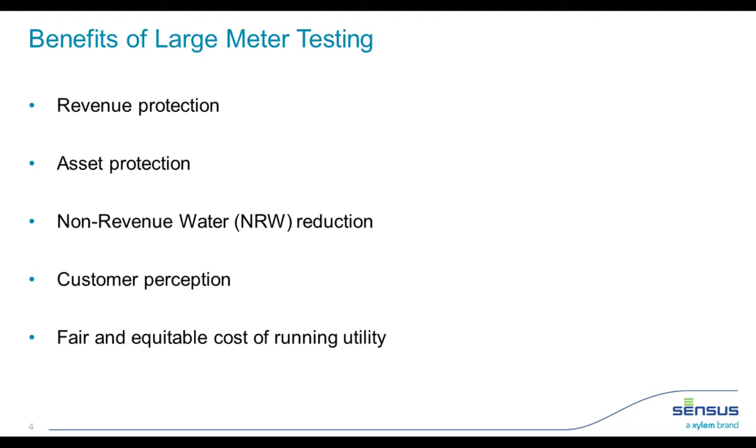A good meter testing program discovers those accuracy drifts and allows you to recalibrate those large meters and protect that revenue stream coming in. It's listed in the AWWA M6 manual that the largest 10% of a utility's meters account for 40 to 60% of the consumption and ultimately the revenue coming in from water for that utility. So it's particularly important to keep testing the large meters.

The next benefit of large meter testing is asset protection. Utilities spend a lot of money on large meters. It's a large capital investment, so having a good program that regularly tests these and checks not just the meters, but the whole installation—the vault, the plumbing, the valves and installation around the meter. By regularly checking up on those, you're preserving and protecting that large capital investment.

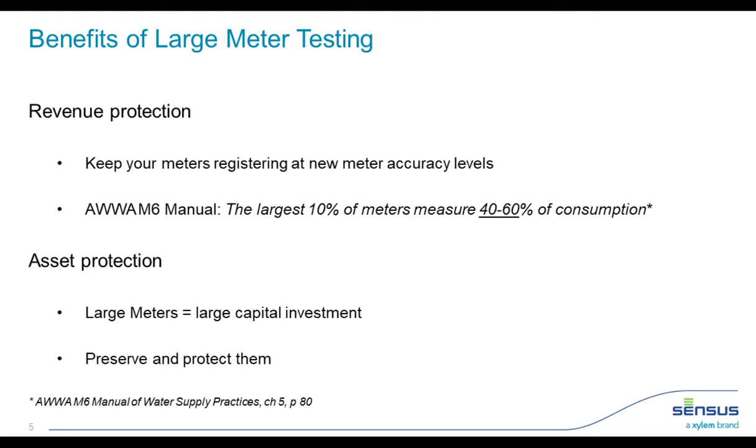Going back to the revenue protection benefit, just an example here. Assume you have a 4-inch meter supplying a medium-sized hospital. According to the Energy Star Portfolio Manager Report in October 2012, hospitals typically use 315 gallons of water per bed per day. So about a 300-bed hospital would use about 100,000 gallons of water per day. So that's our first assumption.

Next assumption is the cost of a meter test is $500. That could be the internal cost of a utility doing the test themselves, their labor, the cost to roll a truck, the opportunity cost of the water they're using and not charging the hospital for, or it could just be the cost they're paying some third party to come test the meter. So that's assumption number 2.

Another assumption is the customer water rate is $5 per 1,000 gallons of water. So if you test this 4-inch meter and discover a 5% inaccuracy, if you're able to recalibrate that meter, you can recover basically $9,000 of water revenue per year. It's a substantial number, and that's for a 5% inaccuracy. $9,000 is enough to more than pay for the test and pay for testing of several other meters.

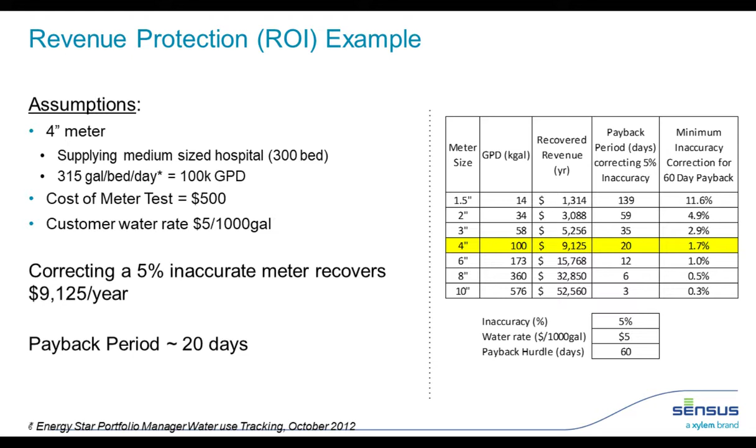Next benefit of large meter testing is non-revenue water reduction. Many utilities are tracking and reporting non-revenue water as a metric. Meter inaccuracy is an apparent loss versus a real loss - it's not a leak, it's an apparent loss, which means that water is actually getting to the customers. It's just not being accounted for, and you're not seeing the revenue for that water. The good news is apparent losses can be addressed with a solid meter testing program.

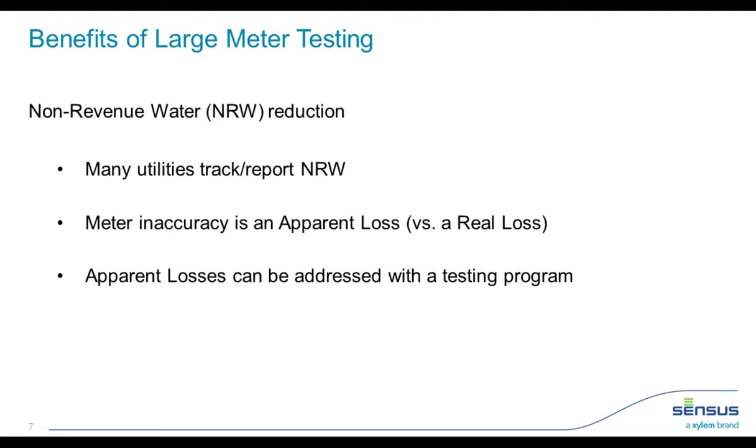Next benefit of large meter testing is customer perception. Take, for example, this scenario: you have an old meter in the ground, it's been running for 20 or 30 years. Let's say that the meter hasn't been tested recently, and over time the accuracy of that mechanical meter has drifted gradually down to about 85%. So the customer is only paying for 85% of the water they're actually using.

Then, let's say a new meter is installed, and of course, at the time of installation, that new meter is going to be 100% accurate. Suddenly, the customer sees the result of this meter install - they see a huge spike in their water bill, even though they know they're using the same amount of water as they were last month or last quarter. So they immediately believe there's an issue with the new meter, when actually it was an issue with the old meter. So having a meter testing program, a regularly scheduled meter testing, can prevent that initial drift down to 85%.

And then lastly, the last benefit of large meter testing is the fair and equitable cost of running the utility. This is straight from the AWWA M6 manual, actually: the primary reason for meter tests is to ensure the cost of water service is equally distributed among all customers. And also, the same goes for sewer costs of running a sewer system, which is usually tied to water billing.

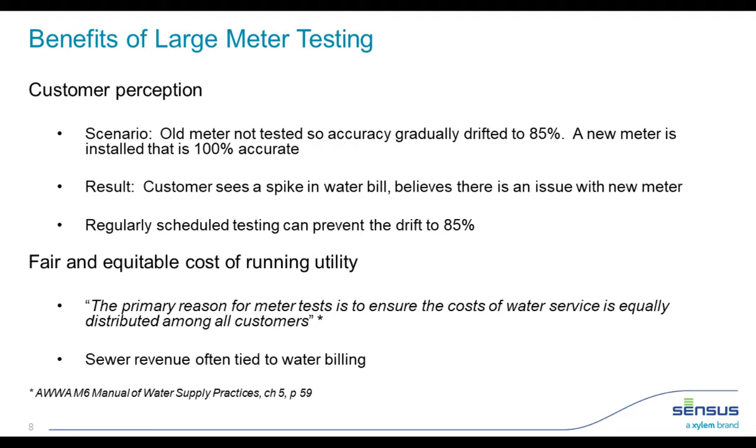Okay, next we're going to get into the testing requirements. In its most basic definition, testing the meter is flowing a known volume of water through the meter being tested, and then comparing that known volume of water to the consumption registered on the meter that you're testing. It can be done either in a controlled environment, such as a lab with a calibrated test bench, or it can be done in the field with on-site testing.

So the requirements for bench testing, of course, you need a calibrated test bench, and then due to the size of the C&I meters, you would need meters with an interchangeable measuring chamber, so you can easily just change the chamber out, take the chamber back to the facility with the calibrated test bench, instead of taking a whole meter out to have it tested.

Next comes trained personnel. You need people that are experienced and trained in conducting meter testing. And then lastly, but one part that's often overlooked is a system to manage the results. You need a way to record all your testing that's accessible, that you can look back a year from now and see how a particular meter tested over time. It's important for spotting trends. Basically, if you do the test and don't record the results, lost results is the same as no results.

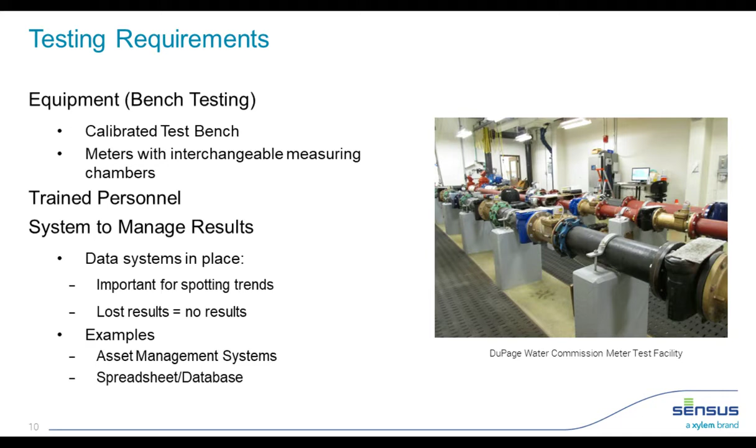So that's for bench testing. The other testing method I mentioned was on-site testing. And for on-site testing, you need a portable large water meter tester, such as the Omni V2 shown on the right, fire hoses and test risers. And then you need site equipment that's specific to the site of the meter where you're testing, such as ladders, hard hats, portable lighting, basically anything that you need to access that location where you're testing the meter. And then you also, of course, still need trained personnel.

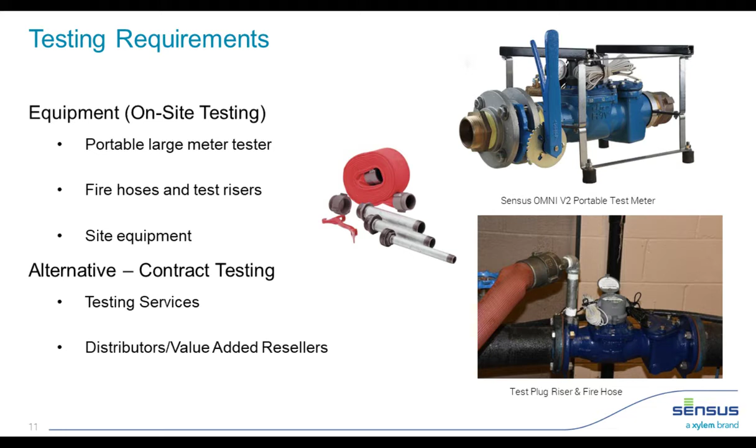The alternative to doing the meter testing yourself, again, is contracting out the testing. There are testing services that do nothing but large meter testing. Also, distributors and value-added resellers sometimes have the ability to conduct a large meter test.

So I went over the equipment and other requirements. Next, we'll jump right into the testing process.

So the first part of the process is basically deciding which meters you're going to test and preparing the site for that meter. You want to prepare the site always per AWWA requirements. And then also keep in mind that safety is the most important consideration when you're testing a meter.

You want to make sure you're following all OSHA safety precautions regarding air quality if you're working in a vault or a confined space, eye protection, ear protection, fall protection if it's a deep vault. At the end of the day, everybody wants to go home, so safety always comes first.

Then you want to consider the order of testing the meters. The correct order is doing the low flow test first, followed by intermediate and high flow tests. If you're testing a compound meter or a fire service meter, those are meters that have two different flow paths. You want to do an additional test, at least one additional test, to test at that crossover rate where the flow goes from going through the low flow to the high flow path.

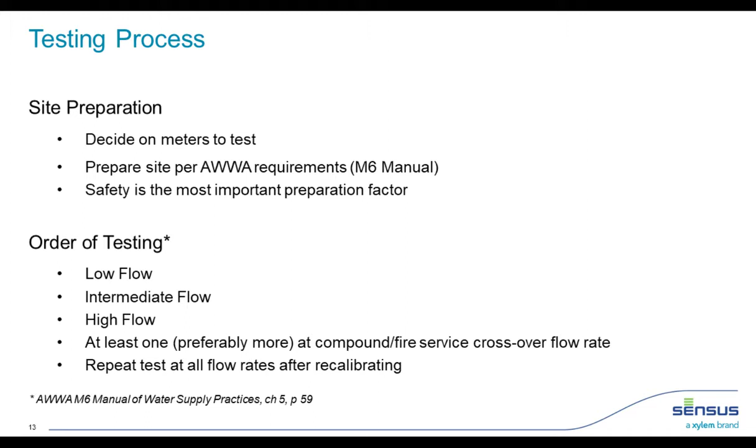Internally in that meter. And then if your test results result in you recalibrating the meters, you always want to repeat the testing process after you do the recalibration, just to verify that the recalibration had the intended effect of adjusting the accuracy of that meter.

So, talk about flow rates next and volumes. There's a lot of different sources or resources to look into to determine your flow rates for which you're running the test. The AWWA M6 Table 5.3 gives good guidance for the high and low flow rates. You also have manufacturer's data sheets that always give a minimum and maximum flow rate for the range of accuracy of that meter. You want to consider the tester capability for your high and low flow rates at which you can test. For the intermediate flow rate, you really want to consider usage-based.

And then also the limitations of the meter or the test port. If you're testing a large meter, for example, but the test port is small, you're going to have a limitation of how much water can actually run through that smaller test port. So that's a consideration when determining your flow rate as well.

We'll start with a low flow test first. Low flow test rates are going to come from the M6 Table 5.3, also your meter manufacturer data sheet, and also the tester capability. So here's an example.

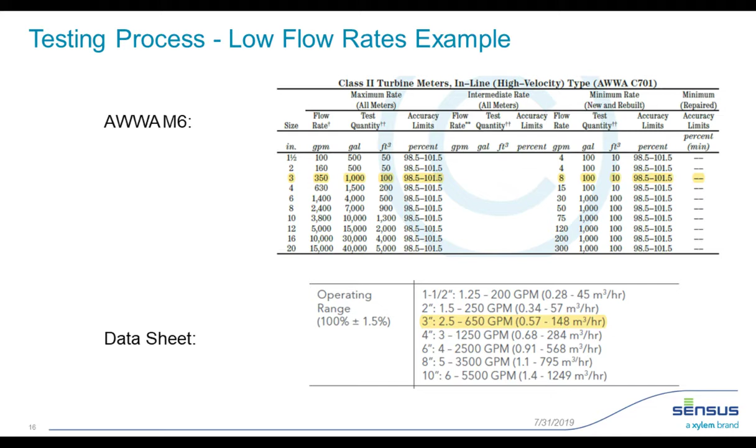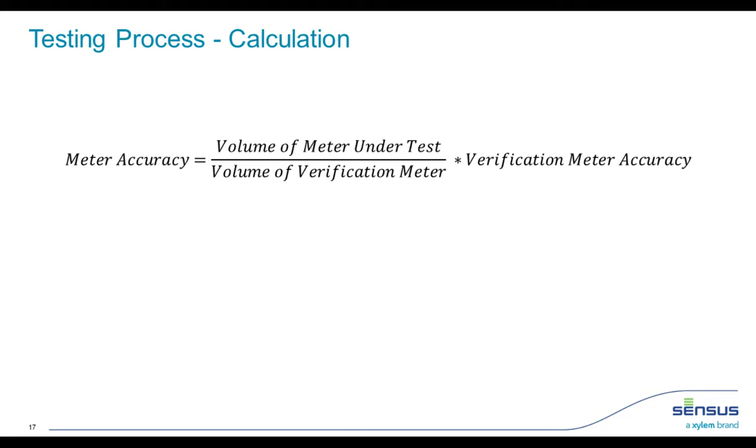Once you conduct your test, here's the basic equation for calculating the meter accuracy for the meter you're testing. You have the volume of the meter under test that you read from the register, and the volume of the verification meter, which is your known quantity of water. Then you factor in the test meter's verification accuracy, plug these into your calculator or software, and that determines the calculated meter accuracy for the meter you're testing.

That leads us to our first source of error that I want to talk about. Particularly in low flow testing, one of the common sources of error is failing to account for the tester accuracy.

On the right here is a typical flow versus accuracy curve for a turbine type test meter. As you can see, down here in the low flow regime, the tester accuracy is highly dependent on the flow rate. Over here in the mid flow or high flow, the curve is pretty close to 100%. In this low flow, though, it can be as low as 97%. So by not including that meter tester accuracy factor in the calculation, your calculated meter accuracy for the meter you're testing could be off.

Another common error in conducting the low flow test specifically is not running enough water. Let's say you're testing a 2-inch meter, and on that 2-inch meter, the register changes, the impeller turns over, every 0.05 gallons. Let's say your test meter in this example is a 3-inch meter where the impeller turns over and changes the register every 1/10 of a gallon, 0.1 gallons.

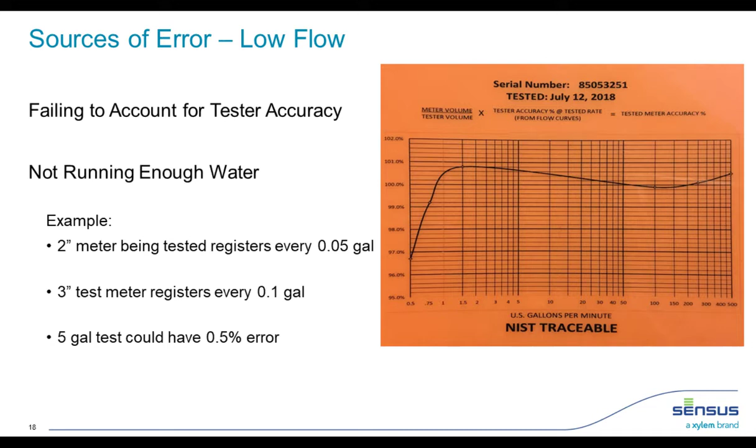Next, we'll get into the intermediate flow test. Your resources for determining the flow rate for the intermediate flow are again the M6 table 5.3, the meter manufacturer data sheet, and then a usage-based method for determining the flow rate.

So I mentioned the M6 table. It actually doesn't contain values for the intermediate flow rate, but what it does say is you use 3 to 10% of the manufacturer's rated maximum flow of that meter. So you have to refer to the manufacturer data sheet, look where the maximum rated flow is, and then select a flow range or flow rate between 3 and 10% of that value for your intermediate flow test.

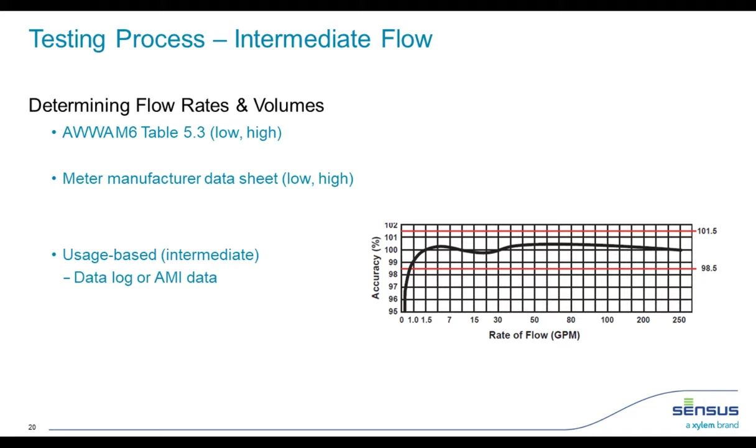The other method, and probably the better method, is going to a usage-based intermediate flow rate. You can get your usage data from a data log, AMI data, or even billing data. In this example, I'll compare why AMI and data log data is much better than billing data for determining the intermediate flow rate.

Starting at 7 a.m., they open up and people start washing their cars. It's pretty steady throughout the day at about 100 gallons per minute usage from the car wash. You have some spikes in the morning, some spikes at lunch when people wash their cars, and another spike at the end of the day when people are washing their cars on their way home.

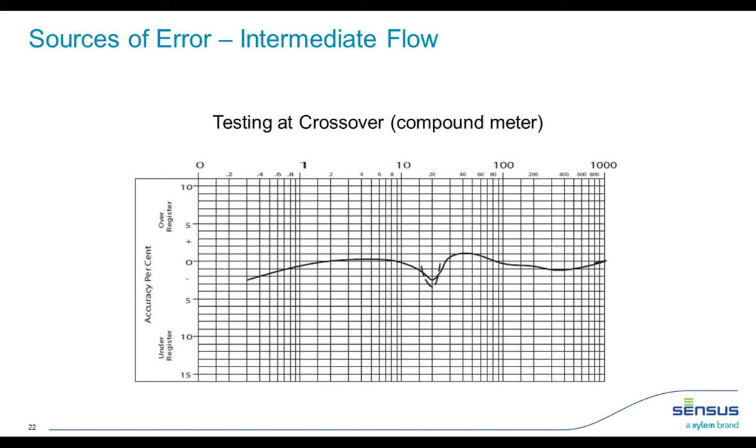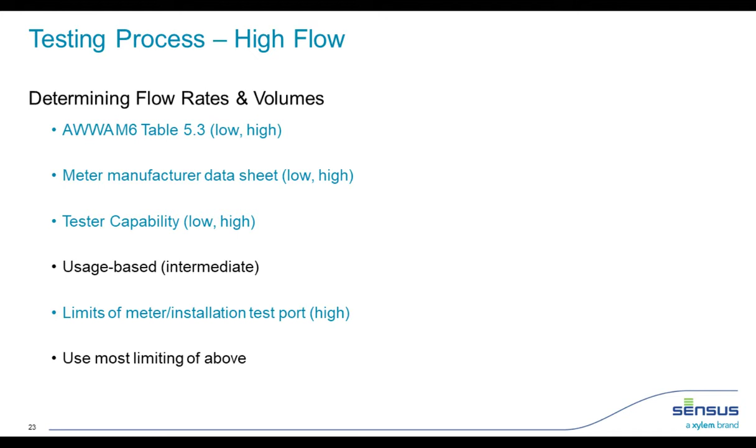And then on to high flow. For high flow, you can get your flow rates from the M6 table, from the manufacturer data sheet. Also keep in mind the tester capability at high flow and the limitations of how much water can flow through the test ports of the meter you're testing.

Max flow rates can be a challenge for very large meters, just because it's difficult to test a meter running 5,000 gallons per minute. So the M6 manual does address this. It says experience has shown that when most meters begin to wear or lose accuracy, it occurs at lower flow rates rather than higher.

If a meter is performing accurately up through the lower 25% of its capacity, of its max flow rate, it will typically test accurately through the rest of the range. This is typically true of the very large meters, which is what we're talking about.

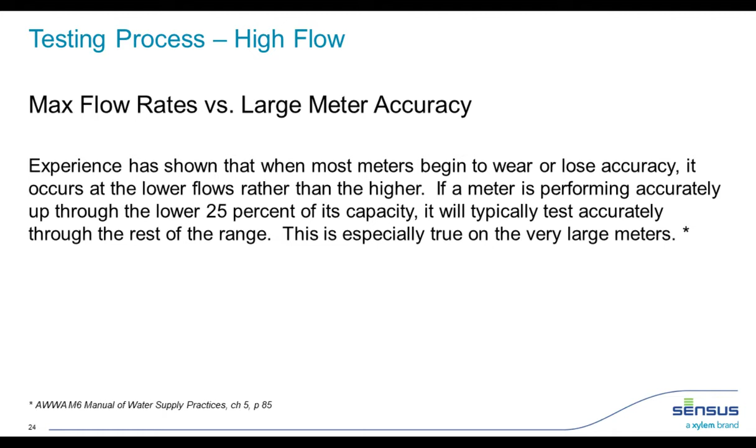So this basically says that you don't have to test your C&I meters at their rated max flow. If you test the meters at 25% of that max flow, that's representative of an accuracy test done at that max flow rate.

Taking this even one step further, here's a flow curve for a 10-inch meter with a max flow rate of 5,500 gallons per minute. 25% of that is about 1,375 gallons per minute. But let's say your tester can only test at a maximum of 500 gallons per minute.

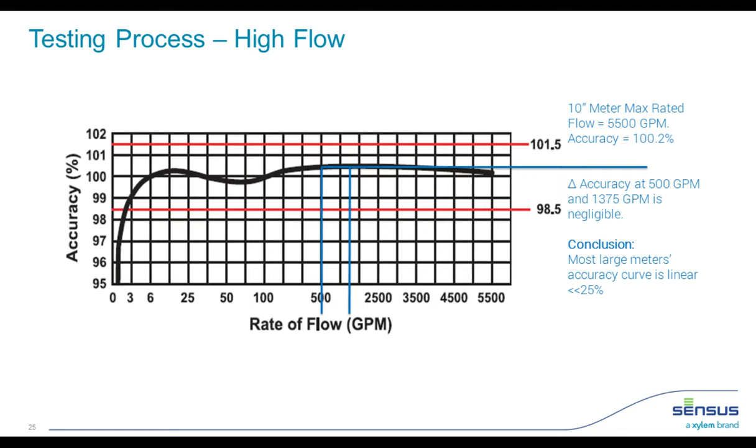Well, what's the difference between the accuracy of this meter at 500 gallons per minute, which is right here, and the accuracy at 1,375 gallons per minute? It's barely noticeable, if anything at all. So even 25% of the max rated flow—if you can't get to 25%, the curve really becomes linear at much less than that. Even down to 10% of the max rated flow rate, you could use that flow rate for your high flow test and still be very accurate in your calculation for that meter test.

Other challenges and sources of error that affect all of the different tests—low, intermediate, and high—include misreading the registers. Of course, if you misread the register, your calculations are going to be off and your calculated meter accuracy is going to be off.

And then also leaks on the downstream side of the meter. If you can't isolate that meter 100%, you're going to have some water going through the meter being tested and sneaking past that isolation valve. That water is not going through the test meter, so that affects your known volume of water that you're using in that meter accuracy calculation.

And then we get to the recalibration. Once you've done all your testing, your low flow, your intermediate flow, and your high flow testing, as I mentioned, many C&I meters allow or have the capability to recalibrate in the field, either by using a screw that turns a vane mechanically, or an electronic recalibration using the electronic register.

When you add a recalibration factor, you want to compare the accuracy of your test results from all three of your tests with the AWWA guidelines, the M6, and then adjust the calibration of that meter so that you're within those guidelines at all of the different flow rates.

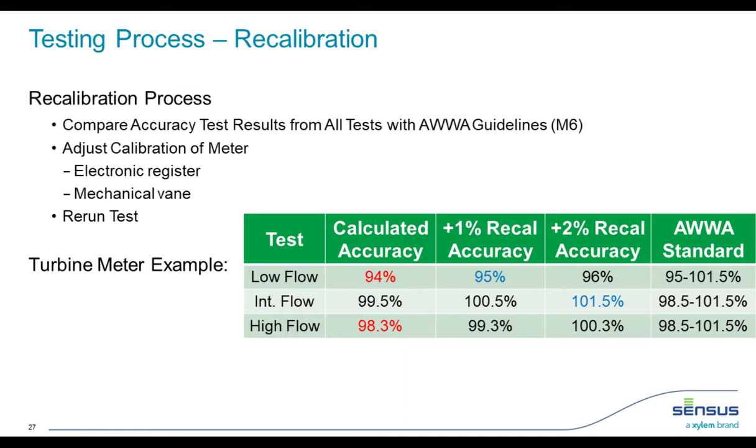Next, we're going to talk about testing frequency. Testing frequency varies widely. It's most dependent on the water characteristics, which can change from region to region, state to state, even town to town. By water characteristics, I mean the chemical makeup, the physical makeup of the water. Does it have dissolved solids in the water? Is it raw water, coming from a lake or a stream, or a well? Typically, harsh water requires more frequent testing.

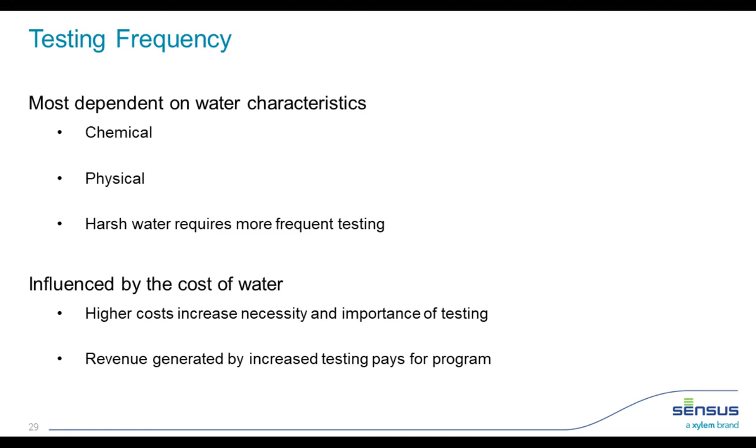Makes sense. It's also influenced by the cost of the water. Of course, the higher the cost of the water, it increases the necessity and the importance of testing. And of course, the revenue generated by that higher cost water pays for the testing itself.

Some common practices for determining the testing frequency of your large meters. Based on revenue production, some utilities test the top 10 to 20% of their consumption meters every half a year to every 2 years. Another method is just picking a specific number of accounts, such as the top 25 accounts, and testing those meters every half year to 2 years.

And then also designating a percentage of the revenue from each meter that goes back into testing that meter. So this would, if it costs $500 to test a meter, for example, and you want to designate 1% of revenue generated from each meter to going to test that meter, you're going to generate that $500 faster on your larger meters and test those meters more often than you would on some of your smaller meters, like an 1.5 or 2 inch.

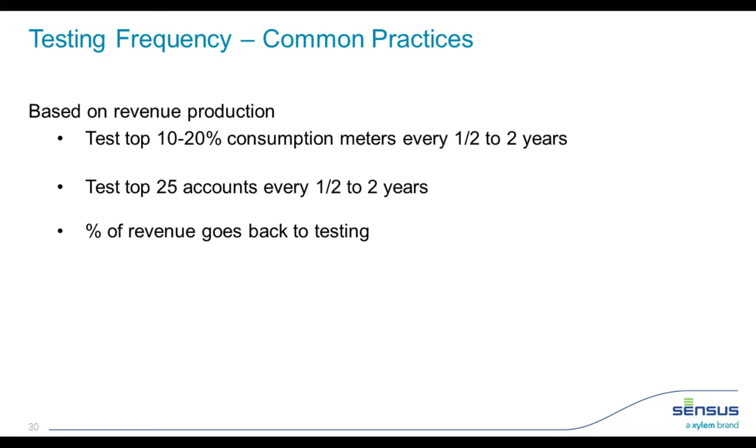Other common practices, one to avoid, is determining your testing frequency based on size alone. This is really straight out of the M6 manual. Because you don't know the water characteristics of your location, the M6 manual says you can't arbitrarily pick a period based on a meter size, just because every system's water quality is different. So this method is not recommended.

However, if you refer back to my previous slide, many times the size of the meters is directly proportional to the amount of consumption, the amount of revenue that goes through that meter. So oftentimes the sizing of the meter does have a direct impact on how often you test that meter. But size alone is not recommended.

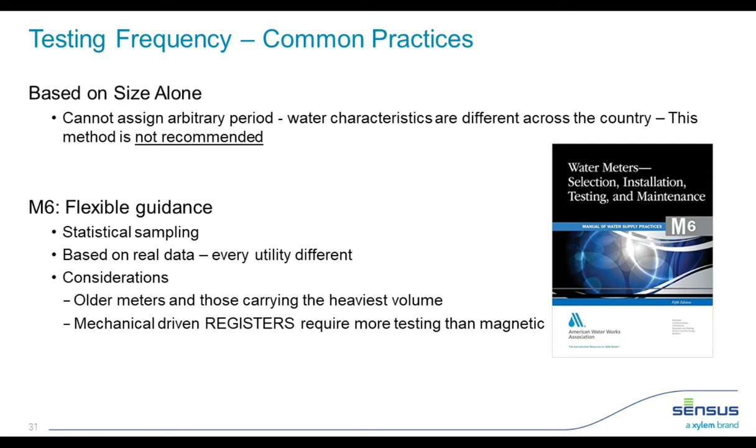And then the M6 further goes on to say that it has flexible guidance, basically. You can use statistical sampling, you can base it on real data, and that makes your data collection even more important. Some considerations: older meters and those carrying the heaviest volumes are the ones you want to test the most. And registers that are driven mechanically versus magnetically, you also want to test those meters more often, again, because they wear faster.

So a few test program success stories. First one I want to talk about is the Jacksonville Electric Authority. It's one of the largest water and sewer utilities in the U.S. with over 25,000 C&I accounts. They implemented a meter testing and replacement program in 2013, realized the need, saw that many of their large meters were becoming very old. So they started their program in 2013, testing and data tracking program.

They started by testing just a few meters, and those early meter tests and replacement funded and justified the continuation of the program. Eventually, over 400 outdated meters were replaced over a 3-year period, and their results were impressive. They claimed 1 billion gallons of measurable water attributed to their meter testing and change-out program.

These slides will be available, which includes a link to the full case study. Jacksonville Electric Authority, Florida's largest public utility, recovers 1 billion gallons of unaccounted for water.

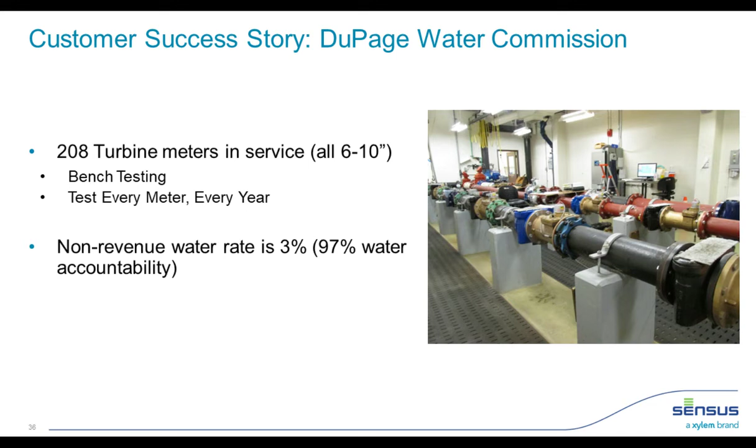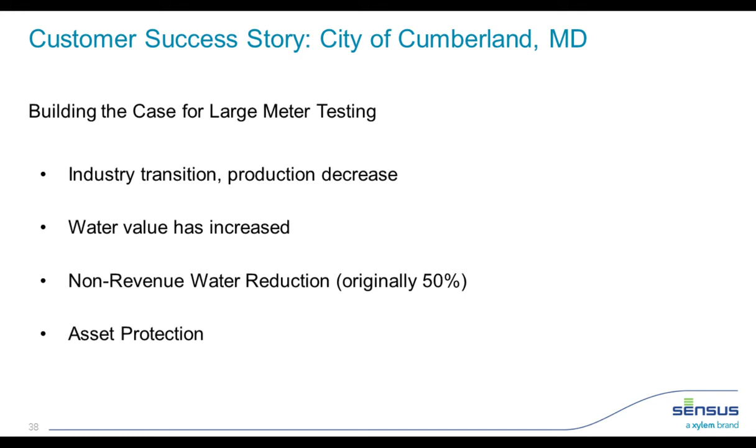They built a case for large water meter testing because they saw their city was in industrial transition with production decreasing. The value of water, the cost of water, was increasing, and they had a non-revenue water rate of around 50%. So they recognized the need to take action and also wanted to protect their assets.

So they started their program. They identified the worst offending meters and replaced them, and that sustained the revenue recovery for additional meters.

The lessons learned from their large meter testing program: success requires commitment to long-term results. You have to make the effort to keep meter testing ongoing and continue investment in new metering technologies. Over a several-year period, they were able to use their meter testing and replacement program to improve their non-revenue water rate from 50% down to about 15% — a big improvement.

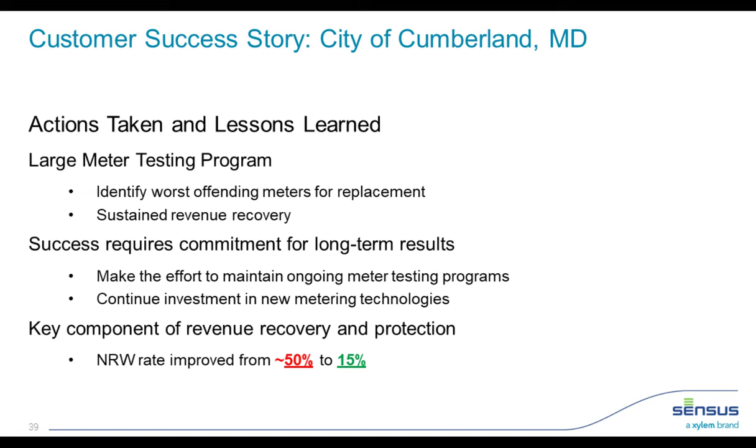So we've talked about the benefits of large meter testing, the testing requirements as far as people and equipment, the testing process itself, testing frequency, and shared a few success stories.

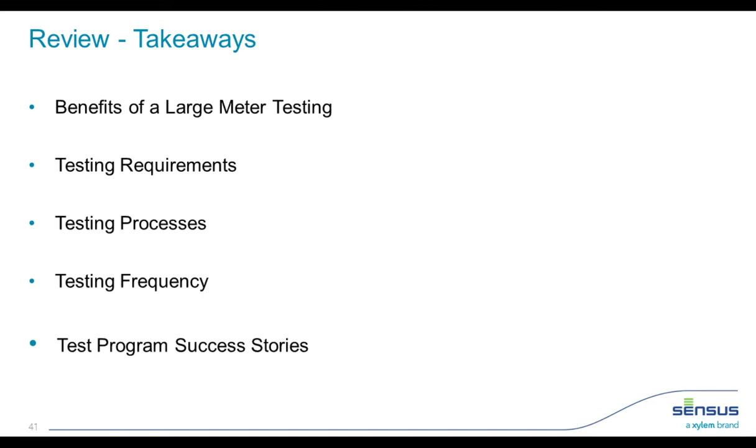So are there any questions?

All right, thanks Jeff, great presentation. Yeah, we do have a couple questions coming in.

First off, this person asked: we test large meters when there's a problem, but we don't regularly have a testing program. What are some keys to starting a regular meter testing program?

Good question. Going back to the slides about the requirements, you need the proper test equipment — either a test bench in a controlled environment and a test facility, or if you want to do on-site field testing, you need the portable large meter tester.

You also need a way to train your personnel and get them experience in large meter testing.

And then, again, the biggest thing is getting that data management system going, so you can keep track of all this testing that you're doing and not lose any of the data. That even starts with just an overall assessment of all the assets in your system — recording where every meter is, how old the meters are, and when each meter was last tested, repaired, or recalibrated.